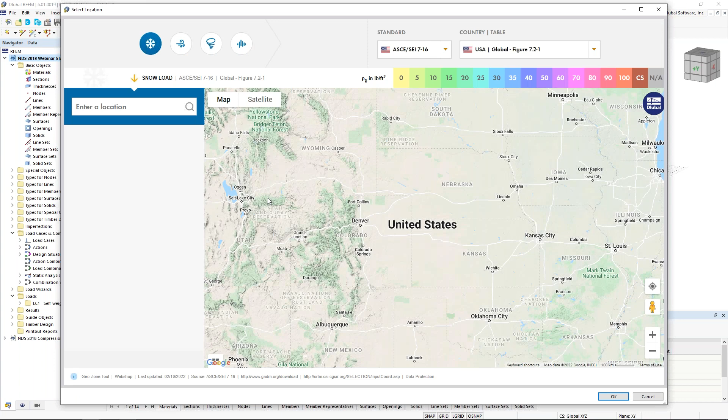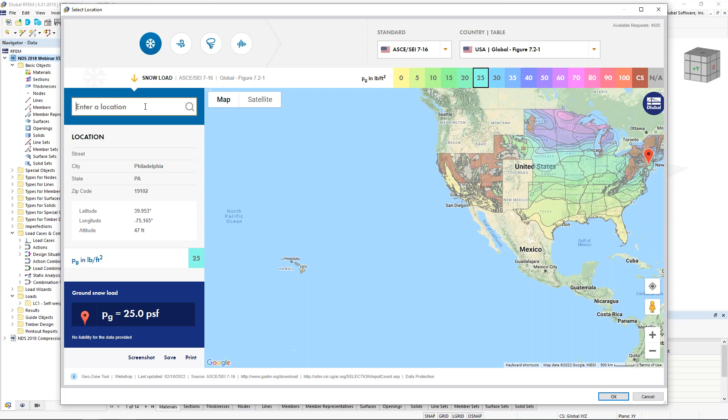Finally, under the model parameters, you can see that this links directly to our online GeoZone tool. This GeoZone tool is available on our website where we have integrated the maps from the ASCE 7 for snow, wind, tornado, and seismic. This is linked with Google Maps technology, so we just need to type in our project location, for example Philadelphia, and we can see the ground snow load is automatically populated here directly from the standard. When I click OK, all of this information is automatically imported into the model that will be used for those load wizards a little bit later on.

Once we are done defining the base data, we will be brought into the main program, and we can see our drawing grid activated here. We can modify those drawing grid settings by right-clicking at grid down at the bottom. My default spacing here is set at 1 foot. If we see anything other than this, for example when you first start the model, you might see something like around 3 feet. You can always hit this default option here to go back to the 1 foot or adjust this to maybe 0.5 feet.

We can also open up our units here and change this to inches if we're working on a much smaller scale.

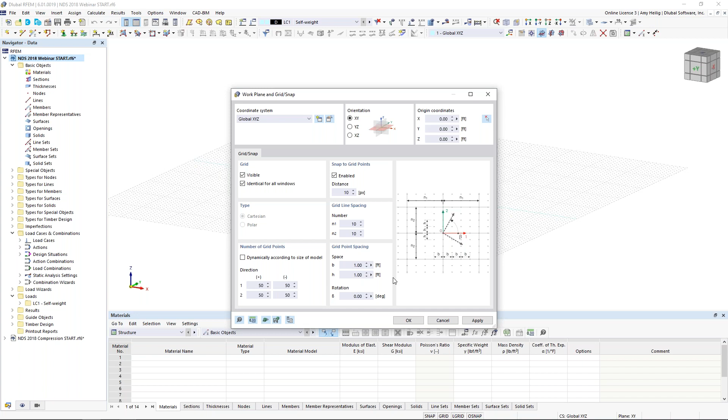There are many different ways to model within the program. We could begin by drawing our first member and defining the cross sections and materials as we go. But an alternative option I'm going to take is to define all of my cross sections and materials at the beginning. So over in the navigator, I can right click on my sections and create a new section here.

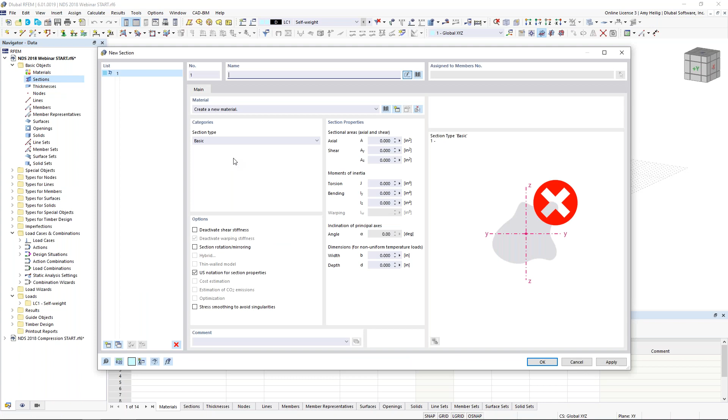I want to access my section library, and we have our standardized sections over on the left, which does include timber. So when we launch this, we can use our filters over on the left to filter the NDS 2018, and we see the various dimensional sections available to us, including glulam, for example, and we can see all of the available sizes.

Now, the alternative option is to go back into the library here and choose one of our parametric massive sections. For example, we can just choose a rectangle. This allows me to input in the dimensions directly, and we'll choose 8 inches in width and 15 inches in depth. The cross-section properties will be automatically calculated here.

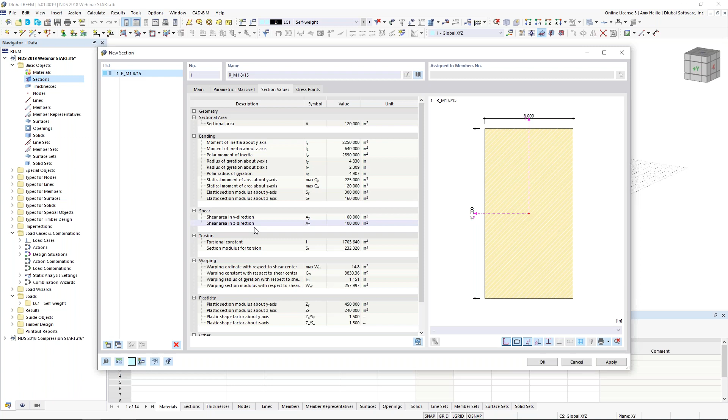And back under that first tab is where we need to set our material for this cross-section. So we'll visit our material database now, and we can use our filters over on the left here to filter to timber. We can filter to the NDS 2018, and sure enough, we have every single material available here from the NDS standard.

Now we can take it a step further, and perhaps we want to filter to table 5A for our glulam materials. I'm going to select 24F 1.7E. Over on the right-hand side, we can see the different options, and we'll choose Southern Pine. I click OK, and now that material is available to me for all future sections that I will model in the program.

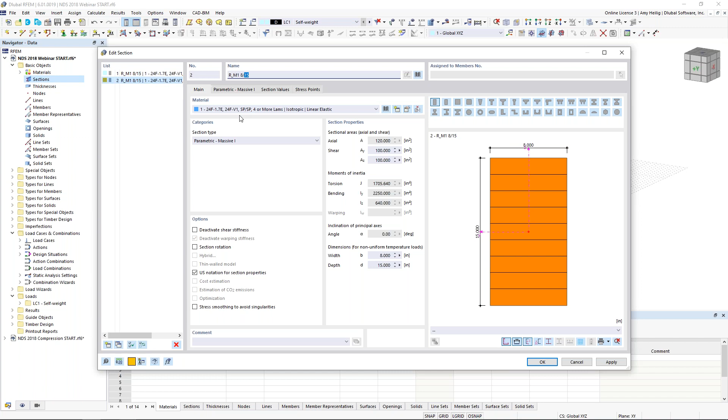I can simply make a copy of this existing cross-section, and rather than going into my library, I can simply type in the exact dimension here, 26. So we'll notice that this cross-section updates accordingly. Same material will be used.

We want to create one more cross-section here. This time, instead of a rectangle, we'll choose a parametric square section. Under the massive tab here, I will go ahead and adjust the dimensions to 6 inches. Under the main tab, I don't want to set glulam, but rather I'm going to go back into my material library and choose table 4D.

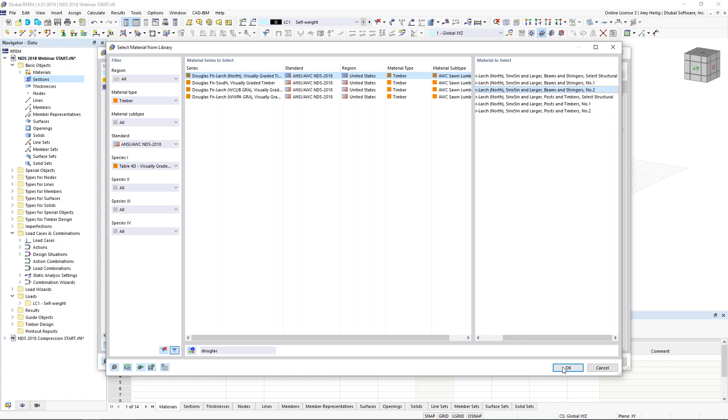Now we can see all of the available materials to us, which is still a little overwhelming, so we can take advantage of the search options down at the bottom. For example, if I begin to type Douglas, notice that all of the materials with Douglas within the name are now filtered. So I can choose Douglas Fir-Larch North, and then I can scroll over to select number 2. I click OK, so now we have that solid section given to us here.

Once I click OK, what I'll notice is that my materials and cross sections are now available within my navigator here. So I want to begin by drawing my first member.

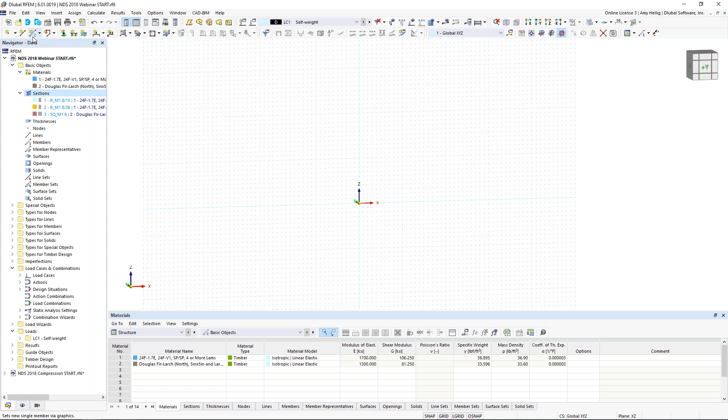I will adjust my drawing grid into the vertical XZ plane, and I will go up to my tool to draw a new single member. The member type is going to be beam. The design properties are activated here, and this is specific to the Timber Design add-on and relative to these additional tabs up at the top.

We'll leave this enabled, but I'm not going to get into the details right now specific for the design properties. We'll go to the section tab here, and the distribution type is going to be set to linear.

This allows me to define a tapered glulam section. Now, new within RFEM 6 is that previously we only allowed you to define a tapered section that looked exactly like this, where the center line just runs right down the center. But we have added within RFEM 6 the ability to adjust the alignment. So now we can see that the taper only occurs at the bottom section of the member.

The member start will be that 8 by 15 section, but the member end will be the 8 by 26 that we've already defined. The material is automatically set here, so this is all that we need to do to define our first member.

We click OK, and I can snap from the point 0,0,0 up to a point 15 feet in the vertical direction, and we have our first tapered member. Now, in a similar fashion, I can snap to a point here 23 feet in the X direction up to the top of the column.

If I right click to exit out of that dialog box, I see here that I would like to add in some type of pitch for my roof, and I'd like this pitch to be 14 degrees.

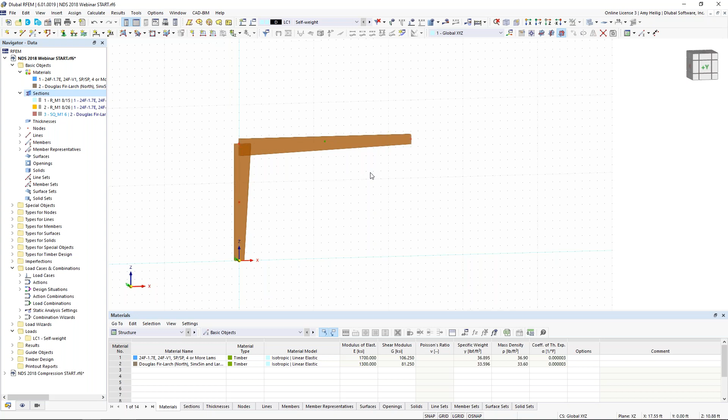So rather than manually having to figure out the geometry, we can select this member, and under the edit options, I can go down to rotate. And I can input an angle of -14 degrees.

I would like to rotate about the global Y-axis in the vertical Z direction, and then I need to graphically select my base point here. I click OK, and so now we'll have that 14-degree incline.

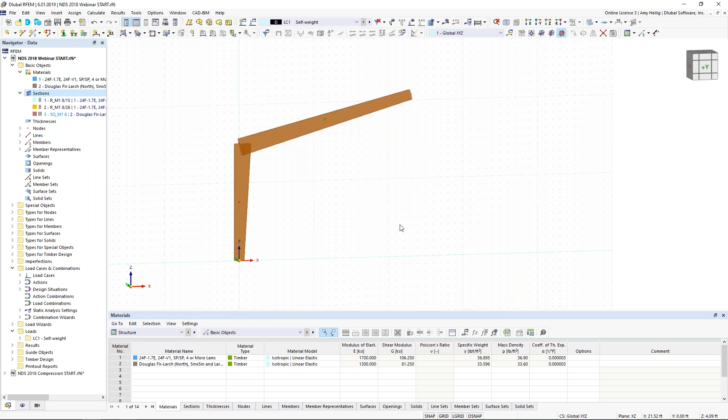I select both of these members, and I'm going to utilize my mirror tool. This is exactly like what we would see in something like AutoCAD, where I can create a copy. I would like to mirror about the ZY plane, and I'm going to choose my mirroring point right here at the apex. I click OK, and we should see our first frame generated.

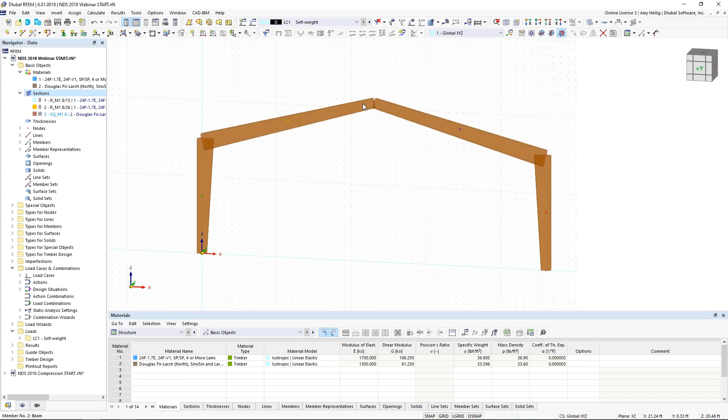Now I want to add a member hinge at the top here only for my beam on the left. I can do so by double clicking on the member. By default, everything is considered fully fixed, so in order to add that member hinge, I can activate the hinges here.

And now we get a new tab, and at the member start, I can define my member hinge. The program automatically suggests I probably want to release the moment about the local Y and local Z axes. That's correct.

I click OK, so now that member hinge definition is available to me for any future members within this model. I don't need to keep redefining; I can simply select it from this drop-down box. I click OK, and now we should see that member hinge applied to that beam on the left.

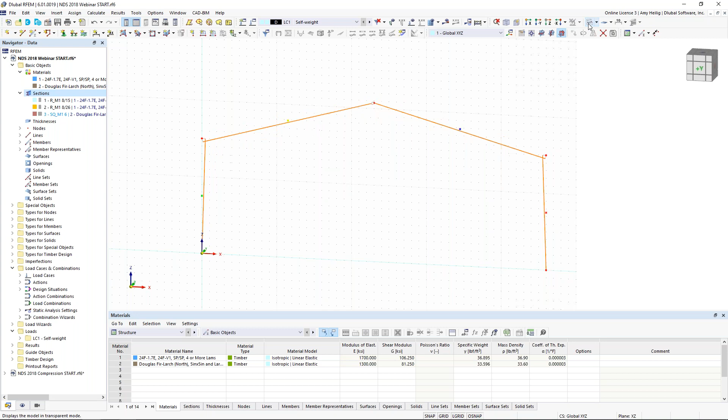So I'll turn this into wireframe view, and I'm going to turn off my member representatives in order to make this a little bit more clear for you.

I'm going to hold down my control key to select both of these top members, and I'm going to right click, and under members, I am going to divide the member by a set number of intermediate nodes. I want to add 2 nodes along the member length here, but it's really important that I also check this option down at the bottom to create the on-member nodes without actually dividing the member. We want to keep these as one continuous segment and just have these nodes added along the length.

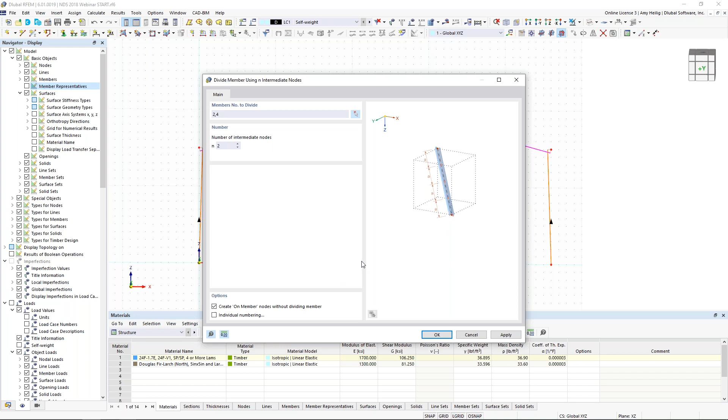So when I click OK, you'll notice that these nodes are added. They're a different color than my standard nodes. If I double click on it, the reason why is because it has this special setting here: the node type is set to on member rather than standard.

So now any other member that frames into this original member, maybe we add in some nodes at these, or add in some loads at these specific nodal points, will all be detected along the member length.

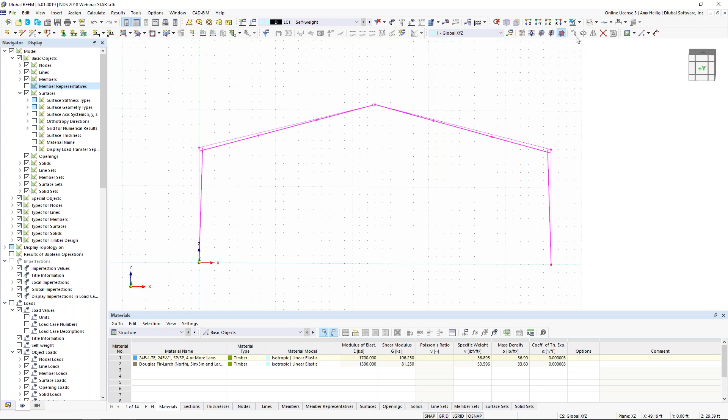I'm going to take my selection box and drag from right to left, and notice I am not going to select the nodes at the bottom of the structure, and there is a reason for this. We will select all of these options except for those nodes and utilize our Move Copy tool.

The Move Copy tool allows me to create a copy, and I'll create 4 copies in the Y direction of 16 feet. But under my second tab, I have this option to activate these step links. So when I activate this, I get a new tab, and the program allows me to create new members between my copied nodes. So I can create a new template, and this should look like a familiar dialog box.

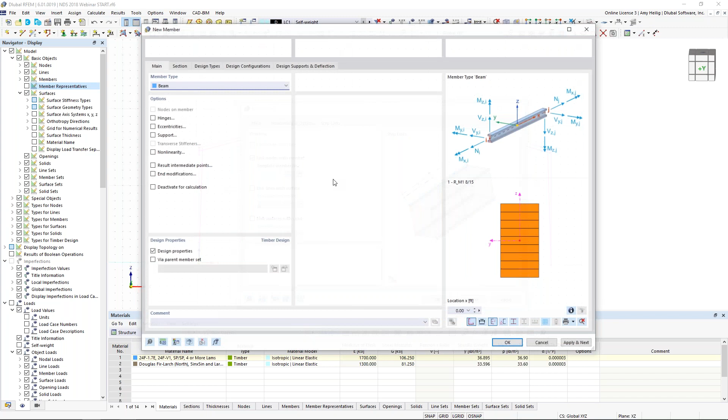It's as though we're drawing a new member. The member type is going to be set to truss.

So truss is a little different, and you'll notice that the hinges is now grayed out. That's because internally we're going to assume that we have a moment release at the member start and the member end. So rather than having to manually define that, we can select truss, and that's automatically applied.

Now for my cross section, I want to use my drop-down box here to select that 6x6 solid Douglas fir-larch section. I click OK. Remember, I'm still within the Move Copy dialog box. I click OK. And again, the advantage is that the program has automatically generated those members between those copied nodes.

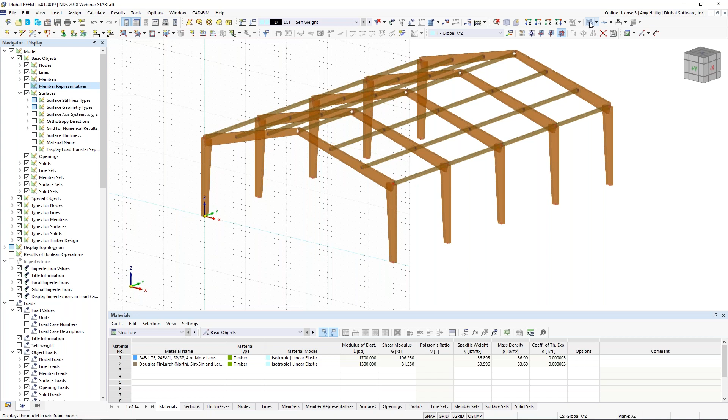Okay, so what we would like to do now is to add some columns at the front and rear of our structure. What I'll do is turn this back to wireframe view, and I'm going to adjust my drawing grid origin with this button up here in my toolbar. And I want to snap that directly to this point along my member length. So we can see when we rotate this around, the drawing grid's still at the front of the structure, but I've just modified the location.

We're going to draw a new member. The member type is beam. I do want to activate the hinges here. At the section tab, I will leave this as the 8x15 section, but not tapered, just one continuous section throughout the length. For the hinges, I would like the member hinge to be applied to the member end. Remember, I've already defined that member hinge. I can select it from my drop-down box.

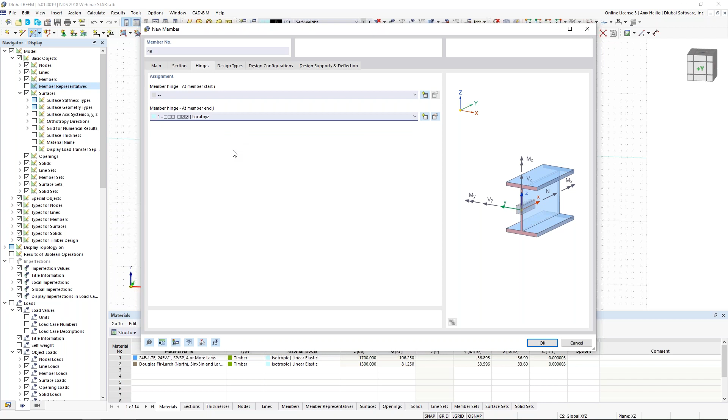I click OK, and I'm just going to snap here from a point at the bottom of my structure up to the top, the intersecting node. Now, this node needs to be slightly adjusted at the bottom. Rather than sitting at negative 0.33, I want it to sit at 0 elevation. I just adjust that, I hit enter, and now that column is exactly where it should be. I can highlight this element, hold down my control key, and utilize the drag and drop feature to make a copy here on the right side of the structure.

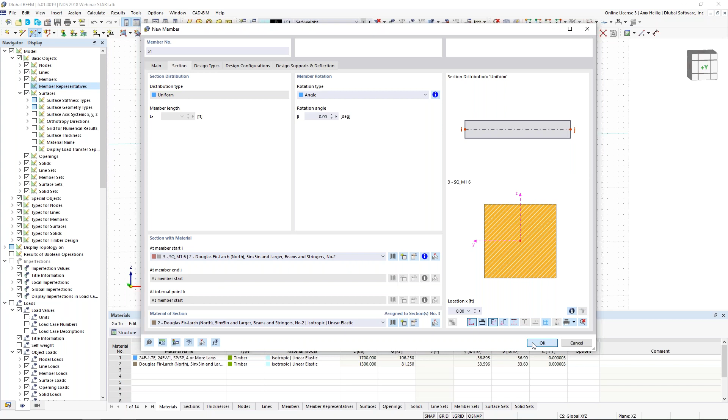I would like to add in some additional lateral bracing here in the global X direction. So we go to draw a new member. Once again, the member type will be set to truss. The section is going to be that 6x6 solid section here. Remember, I don't need to apply any hinges because internally the truss option is taking care of that. And I'm just going to snap from the bottom of my column elements up here to the top. I can rotate this around. Notice the program automatically snaps to these nodal points.

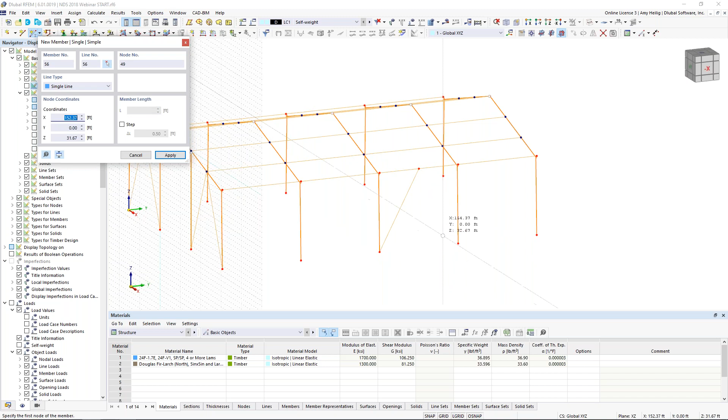While I'm still within this dialog box, I want to add in additional lateral bracing here in the global Y direction. So I will snap from the bottom of the column. Notice the program detects the midpoint here of that truss segment. And I'll do so up here on the roof by just selecting my start and end node points. And we'll do it one more time here. I right-click to exit out of this dialog box, zoom in just to make sure everything's connected, everything looks fine.

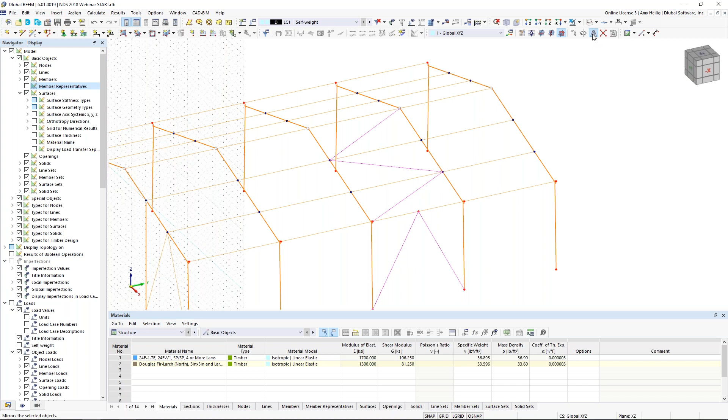Now I'm going to hold down my control key to select these additional brace elements that I just created. We'll utilize our mirror tool once again to create a copy about the YZ plane, and I'm going to select my mirroring point at the top here of my structure. I click OK, and now we have the bracing on the other side.

I would like to take these elements at the front of the structure. I will use my selection box to highlight them all. I hold down my control key, I drag and drop to make a copy at the rear of the structure. So now those column elements and braces are shown at the rear of the structure with that simple tool. Okay, the member modeling is now complete.

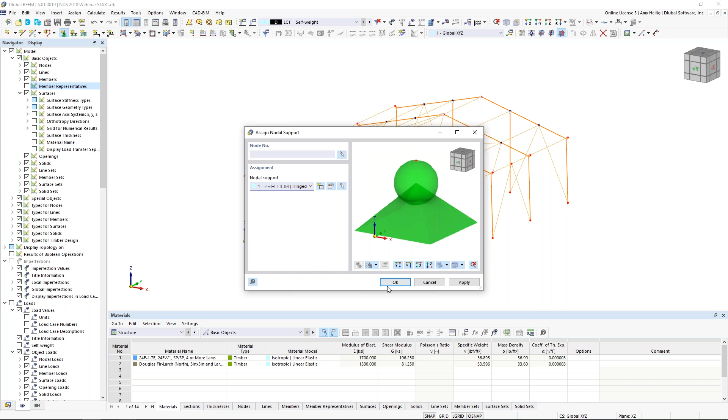What I would like to do is to support the structure with a new nodal support, and we can find that up here in our toolbar, assign new nodal support. Now we have some default options here within the dropdown, including a typical hinged, we have fixed, or we have a few roller options. Of course, you can always create your own nodal support option with the 6 degrees of freedom. Non-linearities are available in there as well, but for today, we're just going to choose the default hinged. I click OK, and this will allow me to highlight over all the nodes at the bottom of my structure.

And if I right-click to exit out of that dialog box and right-click on any one of these nodal supports, I can use my slider option here to increase or decrease the size. So that's also new within RFEM 6.

So our member modeling is complete. We've added the supports. I'd like to move on to loading now, but there's one thing that I want to take care of related to modeling that does affect our loading. So this will be a structure with obviously some type of roof membrane. But I don't want to actually draw in the roof surface with a material and thickness. Rather, I'm going to take advantage of a new feature within the program for load transfer only.

So I'm going to draw a new surface, and the surface is not going to affect the stiffness. It does not add any rigidity to the structure. We're not applying a material. We're purely using it for load transfer to our members. So within our toolbar, we can draw a new surface, and I'll choose the option polygon.

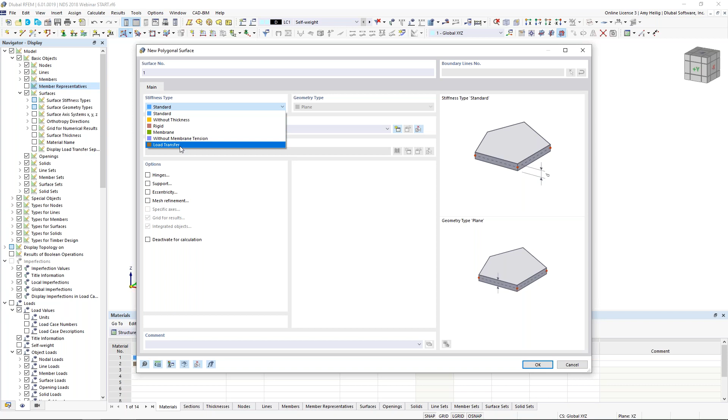So again, rather than the stiffness type set to standard, where I would define a material and thickness, we're going to use our dropdown to select this new option, load transfer. Everything is grayed out here. Again, we're not adding stiffness, but rather we go to this second tab here and we tell the program in which direction do we want to transfer the load.

Based on one-way load distribution of the x-axis, these are local x-axes of the surfaces, local y-axes, or do I want two-way load distribution in both directions? We'll go ahead and stick with only the x direction. And when I click OK, this allows me to snap to my different points here to draw in this load transfer surface on the left side.

And we can see that dotted line shown there in wireframe view. We'll do so on the right-hand side, and we'll go ahead and close this loop by selecting our original point, and here are those two surfaces generated. I can right-click to show the local axis system of those surfaces, and we can just make sure that the local x-axis direction for the load distribution is in the correct orientation.

I'll turn back off the local axes. We can even turn this into rendered view here if we'd like to see those surfaces in a bit more detail. So now that these surfaces are drawn, our modeling is complete and we can truly move on to the loading.

So in order to apply the loading to the structure, we need to set up our load cases. I will go up here to my toolbar to select Edit Active Load Case. Now the program by default creates my first load case here, and it is called self-weight. Well, I can go ahead and rename this if I would like to dead load. Notice the self-weight is active here. The action categories are based on the ASCE 7, and we have selected dead load from this dropdown.

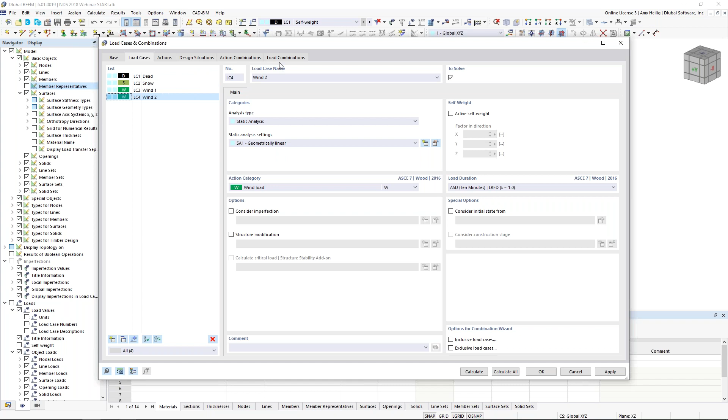I'm going to create a second load case. This will be called snow load with the action category of snow. Self-weight is unchecked here. We don't want to account for it twice. I'm going to create a third load case, which will be wind 1 with the action category of wind load. And I can even make a copy of this existing wind load case to just simply rename it to wind load 2. Now I'll get back into this dialog box to explain a little bit further about design situations and load combinations, but for now I just wanted to set up these load cases.

So now that those are set up, I can actually apply the loads to the structure in the relevant load case. We'll begin with dead load. So the entire advantage of these new surface load transfer options is that I can now apply a surface load to this structure, which is going to be much more efficient than applying individual member loads to each one of my frames, for example. So I'll go up here to draw a new surface load.

And the load magnitude is going to be set at negative 0.01 kips per square foot. I can graphically select here surface number 1 and surface number 2. I click OK, and here are my loads shown graphically on the structure. Now, under the display settings here in my navigator, we will see up at the very top our surfaces tree. When I expand the surfaces, we have this setting here to display the load transfer separately.

So I can activate this, and now we can see the loads applied to each member based on the tributary area. So just a bit of a time saver here by utilizing these surface loads.

Now for our snow load, we want to take advantage of our load wizard. If you remember, we set that up within the base data at the beginning of the presentation. So going back to my navigator here, but this time under my data tab, I'm going to scroll down and I'll see my load wizards tree. And we have available the snow loads. So I can double click on this. And what this will allow me to do is to automatically generate the snow loads according to the ASCE 7.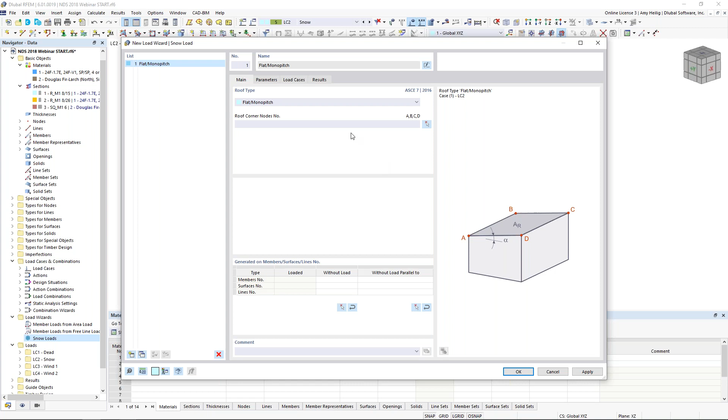So we want to choose the roof type for a dual pitch type of structure. Now, I just want to let you know that this load generator is only applicable for rectangular type structures. If you have anything outside of this geometry, you won't be able to use this automatic load wizard. So just keep that in mind. For today, we do fit into this geometry, so we want to graphically select here the nodes that make up the roof. So we will select the 6 exterior nodes, and I just click one by one. Once I finish that, the program automatically detects what the roof geometry is.

Under the parameters tab, the program has already input my ground snow load. We have connected that to the GeoZone tool directly from our website. It inputs the 25 PSF ground snow load directly from the ASCE 7 maps. Now, of course, you can manually enter in this information as well. Now, the snow load parameters, maybe you'd want to adjust these, such as the terrain category, roof exposure, risk category. We can use our drop-down box for any one of these options.

Under the load cases, we have the ability here to create both the balanced and unbalanced load cases. Now, I'm not going to create the unbalanced for today, so I'll just go ahead and uncheck them, but we will create the simple load case for balance. The program recognizes, okay, we probably want to use load case 2 here that was already set to the snow load designation. So it's populated that.

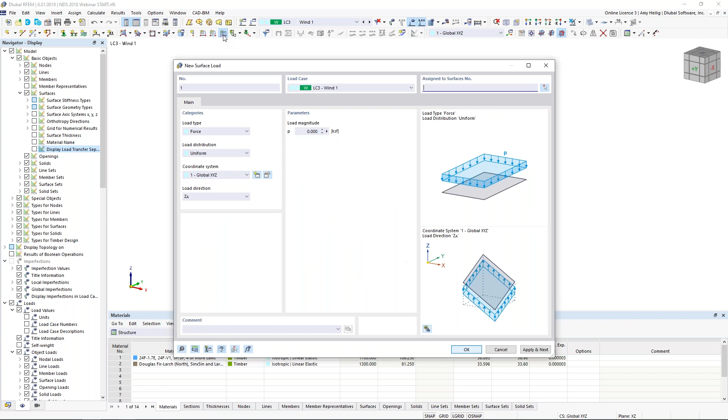Well, for load case 3 here, we will begin with a new surface load. The difference here is that I want to change this based on the local X, Y, and Z coordinates of the surface itself. So we'll leave this according to the local Z direction. I want to modify the magnitude to 0.025 kips per square feet. I select graphically surface number 1. I click OK. And then notice I'm going to hit apply and next. What this allows me to do is to remain within this dialog box, but we can see the upward wind load applied in the background here to surface number 1.

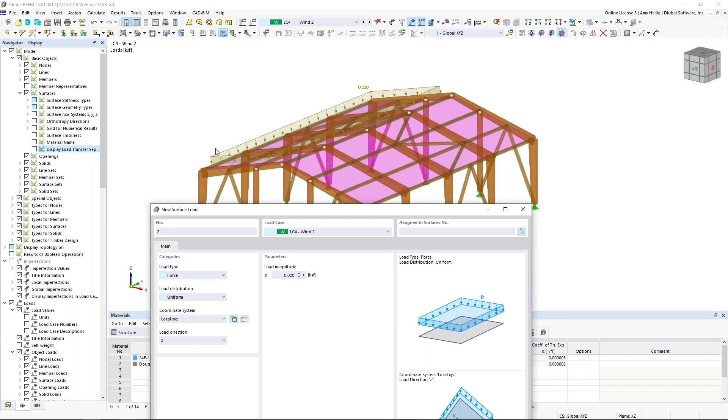Well, now I can just simply adjust the magnitude to 0.015 kips per square feet. I can graphically select surface number 2. I hit apply and next, and now we see that additional surface load applied on the second surface. Well, now I can simply switch to load case number 4, while again, still within this dialog box, I adjust my magnitude to negative 0.02 kips per square feet. I can type in surface number 1. I don't necessarily have to graphically select it. I hit apply and next, and we see that downward pressure applied to surface number 1 under load case 4. I'm going to adjust my magnitude for the last time here to negative 0.01 kips per square feet.

I apply to surface number 2, and I click OK. So now all of our loads have been applied to the structure. So let us go back into the load cases and combinations dialog box here.

Back under the base tab, remember we have activated the load combinations to automatically be generated according to the ASCE 7. The program does require us to choose the wood option because we have activated the timber design add-on. And the entire reason for this is the feature of creep. So let us jump back to the PowerPoint to discuss this in a bit more detail.

This entire topic is new within RFEM 6, and we want to refer to the NDS 2018 section 3.5.2 for long-term loading. Within the code, and this section in particular, it talks about the time-dependent deformation or the creep factor K sub CR. And this factor should be applied to the long-term deflection, but not the short-term, in order to be considered for the total deflection according to equation 3.5-1, and we can see that written here.

So when we automatically generate these load combinations according to the ASCE 7, in particular wood, we are going to create a third design situation. And design situations will make a little bit more sense in just a minute, but I want this to be clear that we are actually going to reference the IBC 2018, and in particular section 1604.3, in order to generate the serviceability load combinations directly from the IBC for our serviceability checks when we go ahead and run the timber design.

And within these load combinations designated within this design situation, one of them will include this creep factor multiplied by our dead load. That's in order to consider creep. So a new feature here, previously we were not able to consider this creep factor. So you'll notice within the drop-down box, if we do not want to consider creep at all, we can just set this to 1.0. But otherwise we would choose the 1.5 or 2 factors here. This comes directly from the NDS standard.

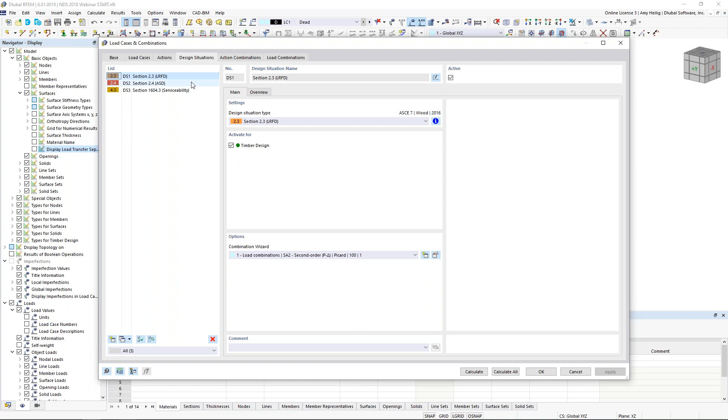I always like to activate this option here, combination names according to the action category. And we will jump to the design situations. So we have 3 design situations generated, 2 directly from the ASCE 7: LRFD, which is our factored load combinations, and ASD, which is our unfactored load combinations. And again, this is new within the ASCE 7 wood, we are going to create this 3rd design situation here for serviceability.

If we want to click this info button, we can see directly the load cases that will be considered for the generation of the load combinations. And here is that creep factor times our dead load. All of these are active for our timber design add-on.

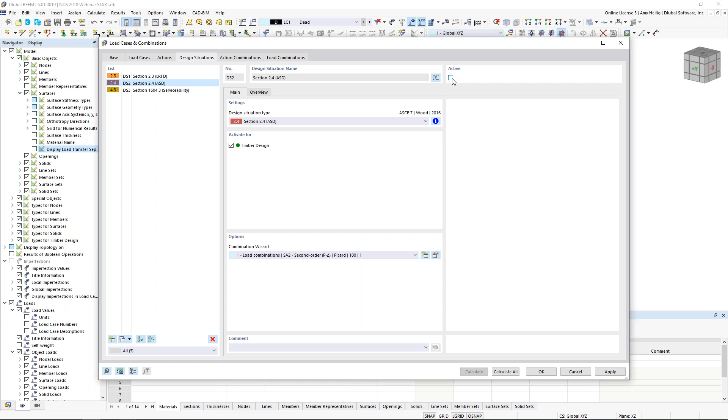Now for today, I am going to be doing my design according to LRFD, not ASD. Therefore, I don't need the ASD load combination. So I can just simply deactivate that here. It will just decrease the number of load combinations, which we can see here under our last tab.

Here are my factored LRFD load combinations for my first design situation, and my 3rd design situation are my IBC load combinations. And here we see the 1.5, and we can toggle here to the assignment, the 1.5 creep factor multiplied by our dead load.

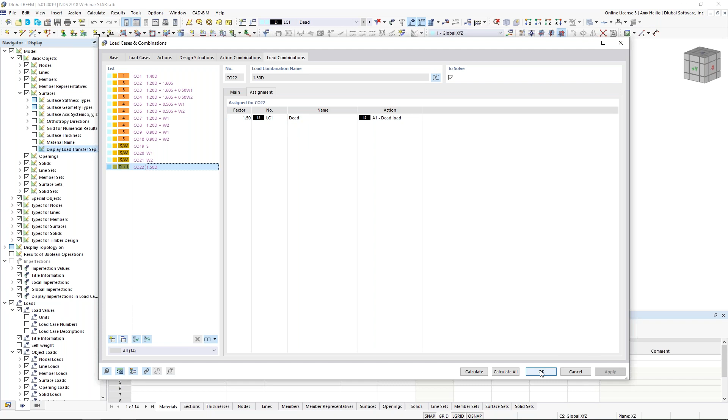Okay, so now that these load combinations are set up, what we can do within our drop-down box is see all of the available load combinations we were just looking at. We can view all of the loads applied to the structure, including the relevant load factors according to the ASCE 7 and the IBC. So technically we are ready to run the analysis portion, but again, the huge advantage of running RFEM 6 is that these add-ons have all been integrated here within the main program. So we want to do the analysis and design workflow together.

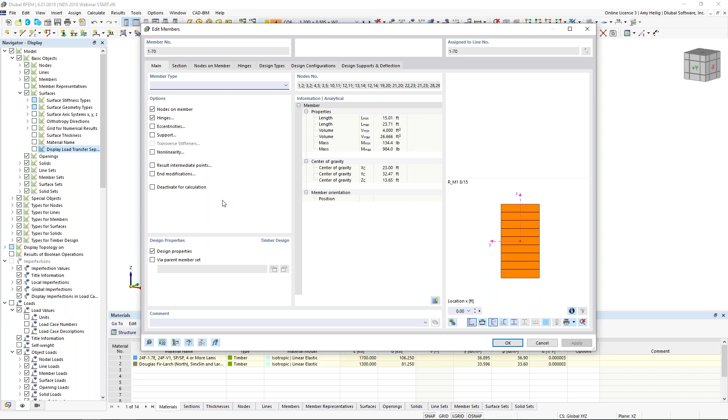So what I'm going to do is to move into the design properties for all of these members. And if I highlight all of my members and I take a look at the edit member detail settings here within my dialog box, you can see I have members 1 through 70 selected. And we have our design properties turned on here, which activates these various settings here for design types, design configurations, and so on. Now, rather than individually setting this information, I want to take advantage now of our member representatives.

So I will go back into my navigator display settings. I'll turn off my surfaces here.

Let me turn on the member representatives and wireframe view. So you'll notice we have a lot of color coding going on here. Again, we have activated that within the base data, so the program has grouped together similar members with cross sections, materials, and so on.

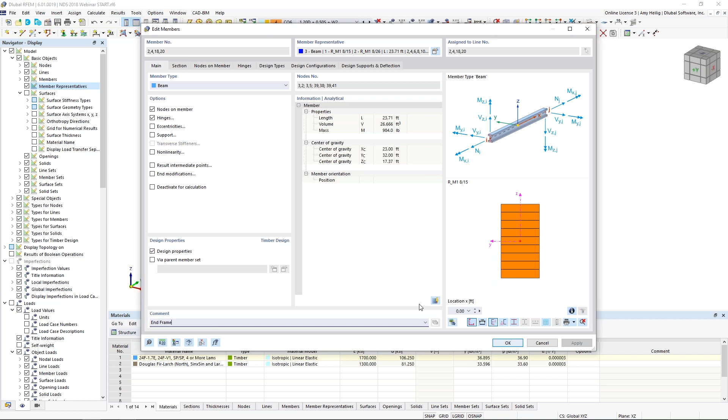Now, I want to take these 4 members at the end, and I'm holding down my control key to select them. I am going to double click to edit, and I'm going to add a comment down here, such as end frame. Remember, I also activated the option at the beginning of the presentation so that member representatives will detect different comments. So now these 4 members are in a different member representative group than the interior members.

Back under my navigator display, I can also see the color coding, and we can scroll through the different member design or member representative options here. Okay, so what is the advantage of these? Well, when I double click any one of these colored dots, so for example, we'll start off with member representative number 4, it will bring me into the member representative dialog box, and you'll notice we have these exact same tabs that we saw for each individual member.

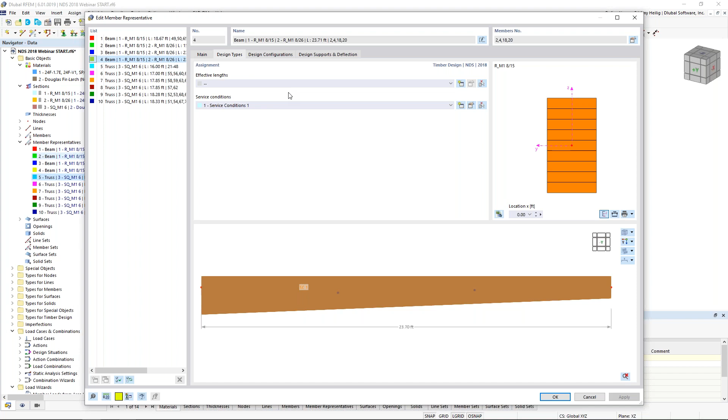So what I can do now is to input the design information for a group of members that I know are all going to have the same unbraced lengths, for example, the same service conditions, whatever it may be. That way I can go into the member representatives, make a change, and it will affect all of those group members rather than individually applying to each member. So let us begin here with these initial tapered members. Remember, this includes the 4 exterior girders here.

Now we want to start off with the effective length. So I'll create a new effective length here. And this is my input information for stability design. So we're talking about flexural buckling about the strong axis, the weak axis, and lateral torsional buckling. Now we want to set the information here on the second tab.

But before I do, when I initially create a new effective length, notice over on the right-hand side, my members aren't populated. Well, if I initially create this definition, I click OK, and I go back into edit the same effective lengths, notice now the program says, okay, we're going to assign this to members 2, 4, 18, and 20. Why do I want to do that? Because now my picture in the lower right-hand corner will populate here. So I can see exactly which members I'm looking at in order to apply my intermediate restraints.

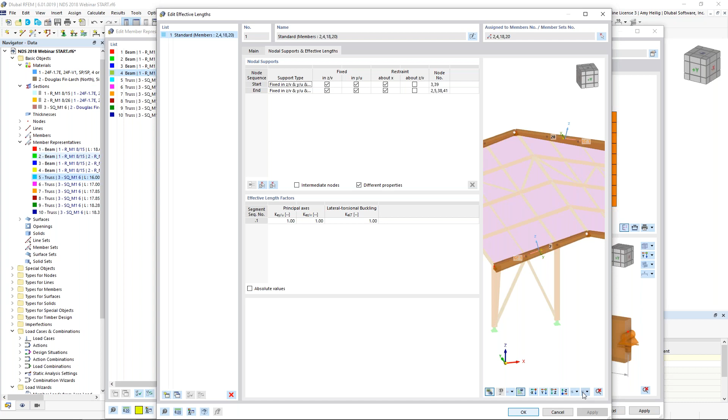So let me turn this to wireframe view. Now, this all has to do with K-factors, with unbraced lengths, incredibly important for design, and we have two options here. Number one is we could work with the table down here at the bottom. Perhaps we want to toggle this to absolute values, and I could just directly input K times L for my strong axis buckling, weak axis buckling, lateral torsional buckling.

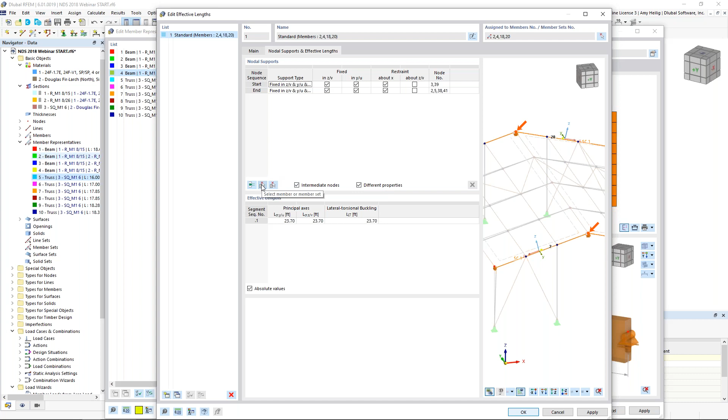Now, alternatively, I can take advantage here of inputting these intermediate supports graphically so that the program can calculate the K times L or the effective lengths automatically for me. What I want to do is to have the program detect the intermediate nodes along the member length. So I'm going to activate this option here, intermediate nodes, and then I'm going to use this option to select the member. I can select any one of these 4 members here. I'll just choose any one of them. And now notice the program has detected these 4 nodes along the member length.

So we'll begin right here at the apex. Well, notice we only have a truss member framing in the weak axis direction. So I probably want to add this intermediate restraint here to only restrain my tapered element in the weak axis or local Y direction. For node number 2, we have a column framing up. So I'm going to assume that this element is restrained in the vertical Z direction, as well as in the weak axis direction from my truss, as well as rotation against torsion at this location.

For my third node here, I'm going to assume these braces really have not much impact, so I'm only going to restrain the member in the weak axis direction. And finally, for my fourth node, we're going to leave this as default in the local Z, local Y, and about the local X axes. So now these 3 segments are updated here to consider my true unbraced length.

This is how we can automatically account for this within the program by setting these intermediate restraints. When I click OK, we can see in wireframe view these intermediate restraints applied internally within the member. They're not true supports like nodal supports that we initially applied at the bottoms of our columns—they're purely used for the design.

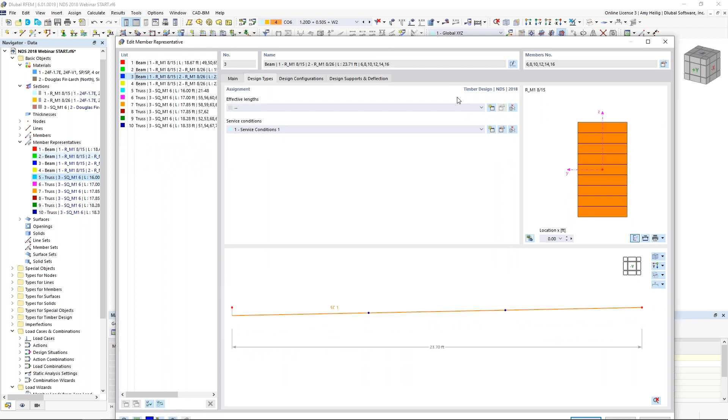Now we want to jump to our member representatives, which include my 6 interior frame elements. We have a bit of a different scenario here, so I'm going to create a new effective length and define it. I'll click OK and go right back in to edit it. Under the second tab, I can toggle to my picture and see my 6 members updated within the graphical view.

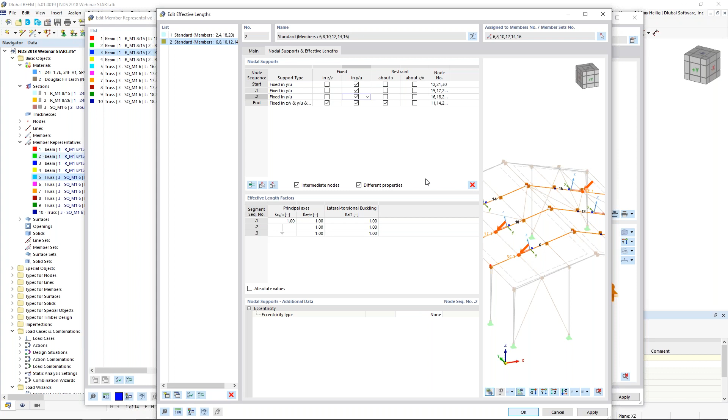I want to detect those intermediate nodes, so I'll graphically select any one of those 6 elements. I see my 4 nodes detected. At the apex, I want to restrain it in the weak axis direction only. At my second node, also weak axis only. My third node, weak axis only—we have no columns framing into the center beams here. But finally, at my fourth node, we do have a column, so I'll assume the program restrains this in the vertical Z direction, the local Y direction, and about torsion. We can toggle to absolute values to see everything updated accordingly.

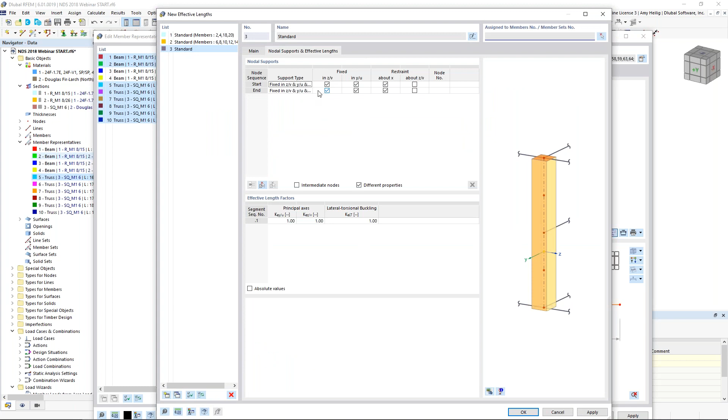Now that we've defined these for the 6 interior members, we can see the program update automatically to show what will be used for design. Let's talk about the remainder of these member representatives—holding control to select all of them, which is all the remaining braces and columns. For this we need to define a third effective length, and this one is much easier: we just leave it as default. These members are supported at the member start and end according to these default options, with no intermediate nodes detected. I click OK, and we see the program update graphically.

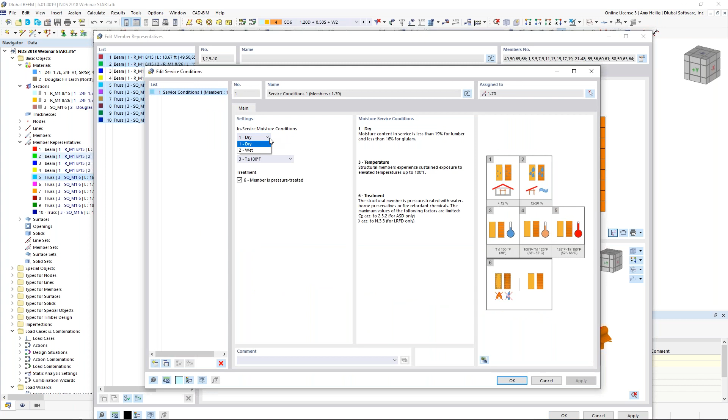For the rest of these settings, the service conditions—if we go into detail settings—ask whether the members are wet or dry, what the temperature is, and whether they're pressure treated. We know this all affects the adjustment factors for the NDS design.

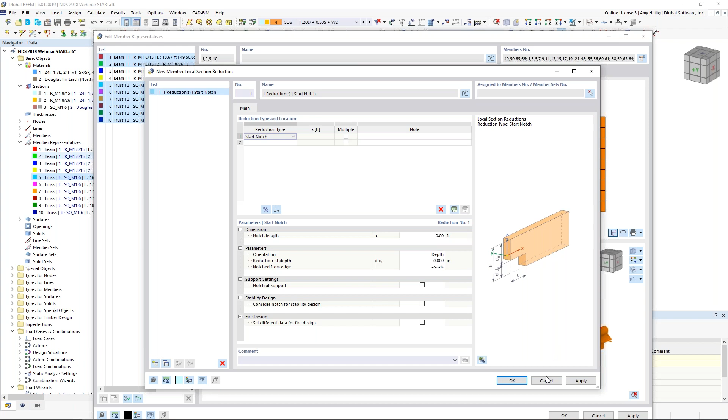The local section reductions let us create notches in our members—perhaps a notch at the member start, the member end, or internally—defined here with these section reductions. This is only available for standard members; you wouldn't see this option for tapered members if we went back to one of those other member representatives.

The design configuration includes strength, design, serviceability, and fire. Let's begin with the strength configuration and go into the settings—various options that go into the strength design specifically according to the NDS.

For example, torsion—if we're not really wanting to design these members for torsion, since the NDS is a bit vague on torsion design, and I want to skip this, I can set a higher ratio here, such as 0.3. So as long as my stresses for torsion are below a 0.3 ratio of the limiting torsion capacity, we'll completely skip this check. That's a little trick you can do within these settings.

We have some additional settings, including the size factors, the flat use factors, and so on. Under the Stability tab, this is a new feature within RFEM 6 specific to the NDS: the representative dimension for tapered compression members. I'll go back to the PowerPoint to explain this in more detail.

Again, this is a new feature added within RFEM 6, referencing NDS 2018 section 3.7.2 for tapered columns. Previously in RFEM 5, for any check along a tapered glulam member, we were just using the depth at that relevant X location. But the code doesn't exactly say that—it says to calculate the representative dimension for the tapered column instead, and we can see equations 3.7-2 and 3.7-3 given to us directly from the NDS.

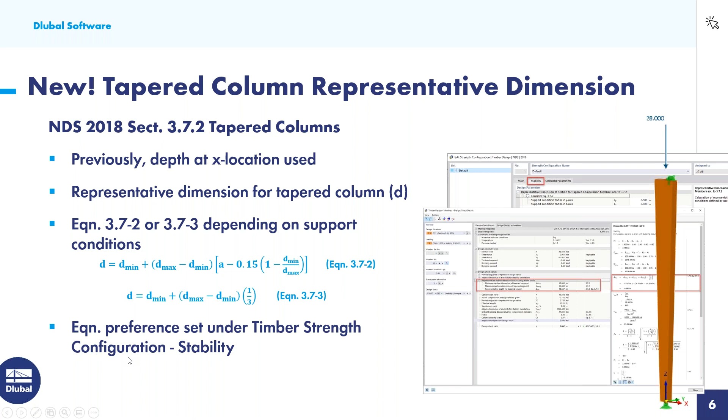Again, this all depends on your support conditions. You'll want to refer to the NDS to review these equations in more detail. The equation preference can be set under the timber strength configuration, under the stability tab, which is exactly what we're looking at here.

So I go back to the model and we can just go ahead and choose either equation. I'll stick with equation 3.7-3. Once we run our results, I'll show you exactly what this looks like and how we can now consider this according to the NDS provisions.

These standard parameters are just going to be all of those various factors that go into play for the NDS design. We have all the default options set here, but you can go in and adjust these as well.

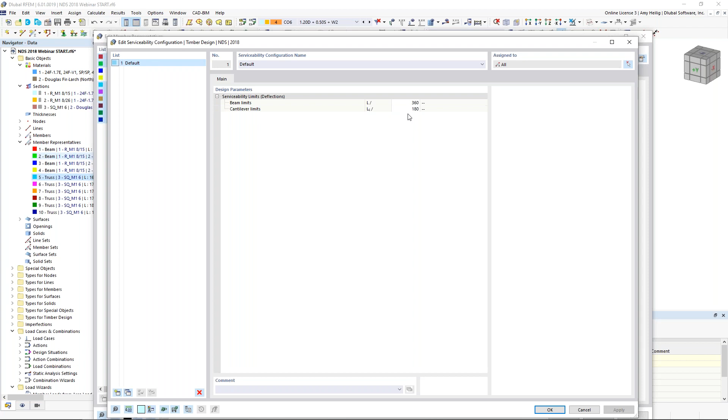So once we have reviewed the strength configurations, we want to take a look at our serviceability configurations, and this is quite a bit more simple. We have here our limiting deflection ratios, for simply supported L/360 and cantilevers at L/180, and you can adjust those as you see fit. Fire resistance design, we won't be doing that today, but that is a possibility to also calculate according to the NDS standard.

I'll just go ahead and clear out this setting for now, that's fine. The design supports and deflection.

By default, the program is automatically going to consider every member as simply supported, so it's going to refer back to that L/360 design ratio. Now, if you have a cantilever, you will need to define a design support, the member start or member end.

I am actually going to breeze through this tab here because our second quick example at the end of the presentation today will go much more into detail for this. So for now, we just want to keep everything as default.

Okay, so once all of these settings have been defined, we are now ready to run our analysis, but also the design of the structure.

So what we'll do is utilize our table options down here to drop down to timber design. This is active because remember, at the very beginning of the presentation, I've enabled that timber design add-on.

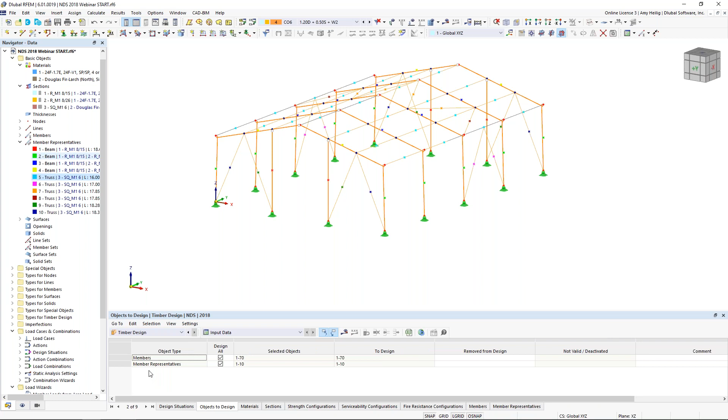If I take a look at my table settings here, in this first tab, design situations, I have my 3 design situations that were generated automatically from the program. We've already reviewed these: my LRFD, ASD, and then I have my serviceability from the IBC.

Well, I'm not doing ASD design today, so I'll just simply uncheck that. Now notice my factored load combinations, or my LRFD design situations, should be associated here with my strength limit state design, so I can make sure that that is selected appropriately from my drop-down box here.

I'm not doing ASD design, so we'll skip over that. Finally, my third design situation here for serviceability should be set according to the serviceability limit state design. Now the program knows which load combinations to refer to for my actual design portion of the calculation.

Now, if we wanted to run fire design, perhaps we go back into that load cases and combinations. We make a copy here of maybe our LRFD design situation, and we can select fire design from our drop-down box here. Under the objects to design, we see members 1 through 70 are automatically selected.

All of our member representatives are already selected here. Everything was defined for our design input for each one of those members, so we should be able to design all of them as well.

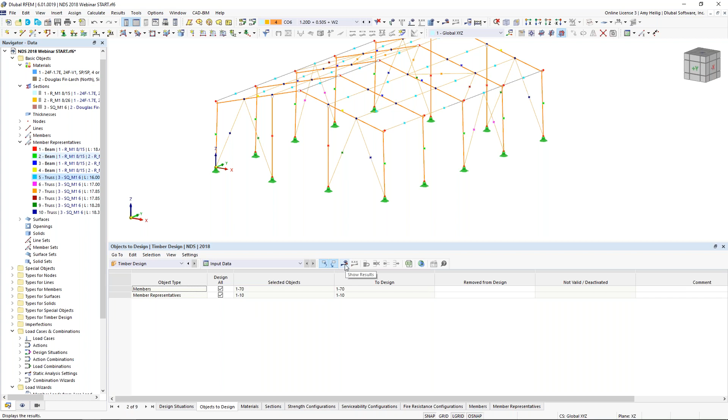I'm now ready to run my calculation, which I can do so directly within this table. So I begin the calculation and the program must inevitably run through all of my various load combinations in order to determine the internal forces, the stresses.

You can see that these solve pretty quick now in RFEM 6, and we're now running the timber design add-on according to the NDS standard, and here we are presented with our results.

So I'm now looking still within the table format for my timber design here, but now I have available the design ratios, such as for the member representatives. Down at the bottom, I can select the design ratios by member representatives here.

As you can see, the program is synced up with the graphical view so that we're showing you every check within the NDS. For this group of member representatives, the program will point you to exactly where the controlling internal force or stress is located.

If we're interested in filtering to only the max design ratio, we can take advantage of the filter options up here at the top. Perhaps we choose the option max, and now maybe we're not so overwhelmed, so we can just see what's exactly controlling for each member representative.

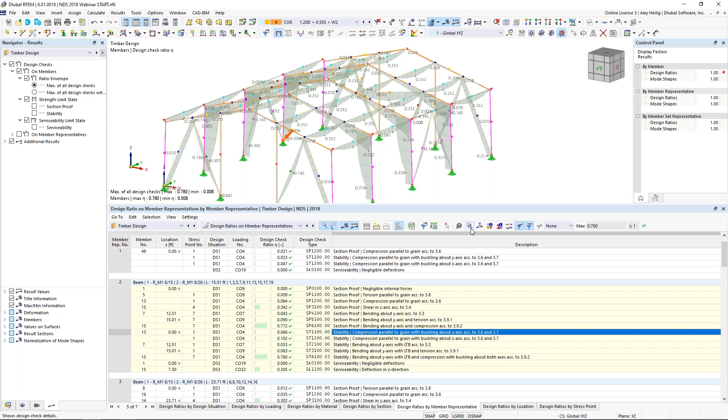Going back to the details within our design, I want to take a look at one of these checks. We can see the member we're currently looking at, one of these columns, and stability for compression parallel to the grain. We've added within RFEM 6 the ability to check out the design check details. I think this is incredibly powerful because now we are showing you all variables, all of the equations here, and also the code references directly to the NDS standard. All this comes into play to determine eventually what is our design ratio here at the bottom.

So incredibly transparent, we can understand where all of those numbers are coming from. We can add this information to our printout report. We can use our drop-down box over here to maybe move to a different section to view the details. But remember, we talked about in the PowerPoint the representative section dimension for those tapered members.

So here are our results now for that new check. We can see the representative depth for the tapered column is now calculated. When I click here, the program automatically highlights which equation is being used, and we can come up with that new depth that will be used for the calculations in stability. Just wanted to point that out - that was exactly what we just reviewed within the PowerPoint.

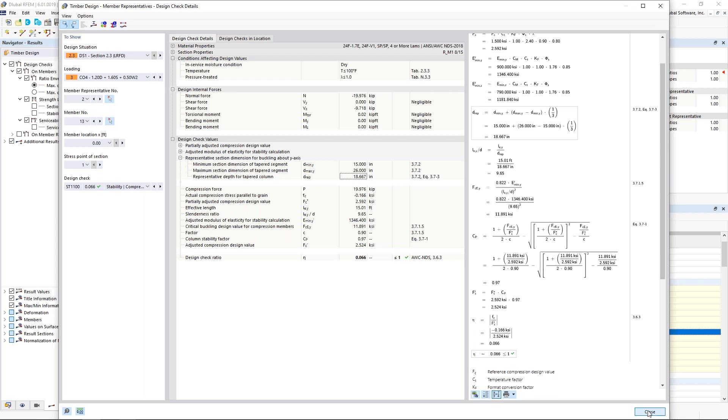Okay, so now that we have reviewed all of the timber design, of course there's much more to look at, but for the sake of time, we'll just give you a brief overview for today. Now, I want to back this up a step.

Let's take a look at only one of our frame elements here, and maybe we choose the visibility by the selected object, so we don't necessarily have to view the entire structure at once. I'm still looking at my timber design, and to briefly mention as well, everything's available to me graphically.

If we go back into our navigator, we can see within our dropdown, we are viewing the timber design results. Perhaps we want to turn off the max design ratio and only turn on the serviceability for this particular frame, or maybe we want to turn that off and take a look at the stability checks. So we can toggle those on and off, and add them to our printout report as well.

But in addition to the timber design, we also have this drop-down box for the static analysis. The static analysis was required to determine those internal forces, the stresses, deflections, and so on. Notice my table automatically syncs up here to drop me to the static analysis, and my results can be viewed in table format. For example, I'm currently looking at the deformation, but maybe I'm interested in the internal forces of the members, so I can see my axial forces here, my shear forces, maybe my bending moments.

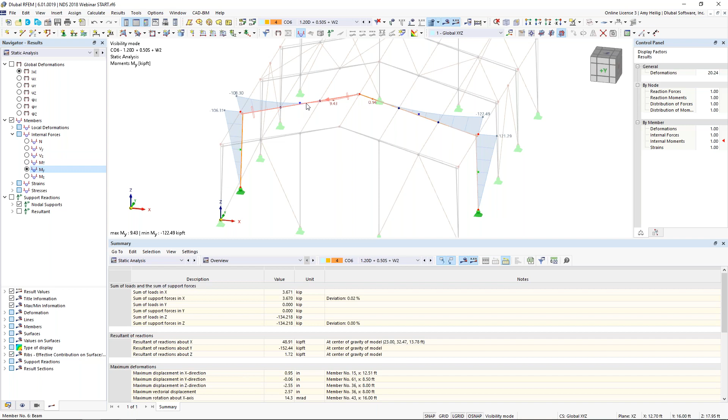For any one of these members, I can right click, and under the members option, I can take a look at my results diagram. The results diagram allows me to turn on and off these various internal forces, deformations. I can view in more detail what's going on along the member length. I can toggle to different load combinations here, add this to my printout report, and also drag this over to my second monitor and continue working concurrently within the program.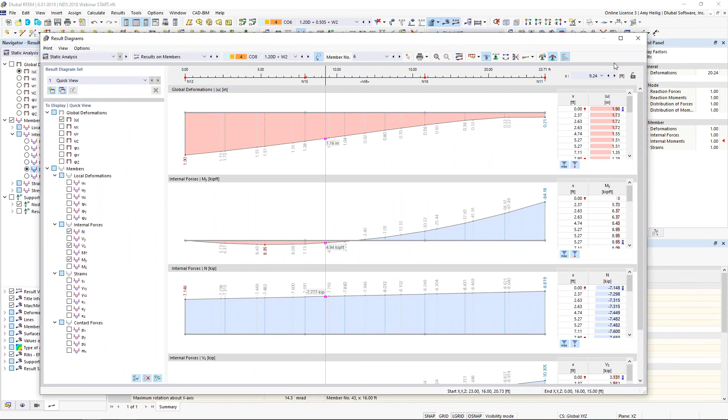So I think it's important to know, again, that both the static and analysis design workflow is working together within RFEM 6, and both of those results are available to us.

Okay, so that will summarize essentially timber member design for the most part of this entire structure, but I did want to talk about one more new feature, and I think that this is best described with a new model, just so we can simplify a little bit here.

So I'll open up this already saved model, and we can see that we have multiple members drawn here. And we have our main girder element spanning in the global y-axis direction. Then I have these additional joist members, and these joists are actually going to be supported by the girder member. So they're technically going to be placed at the top of this member.

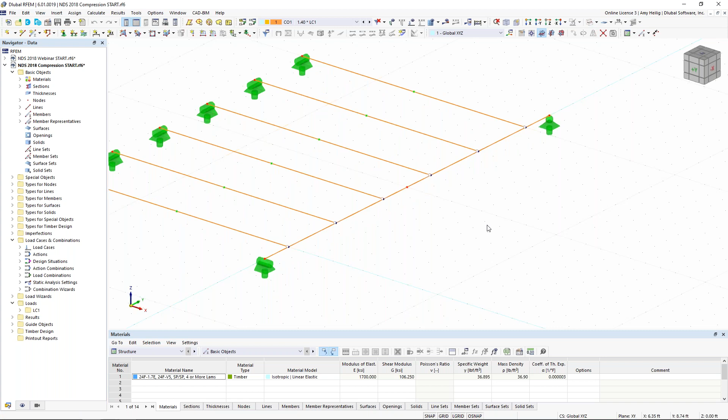When we turn this into wireframe view, we know that with any FEA program, these members are just represented by a single center line. Of course, we can render it just to get a better feel of what dimensions are being used, how these members frame in together. But underneath the hood, this is what's going on.

So if my joists are sitting on top of this girder, sure, I could add in an eccentricity to move these joists up to the top, but sometimes this causes unwanted moments at our member end. So for today's example, we're just going to leave this exactly as it's shown, but just visually know that we want these joists to be framing in at the top of this girder supported by it.

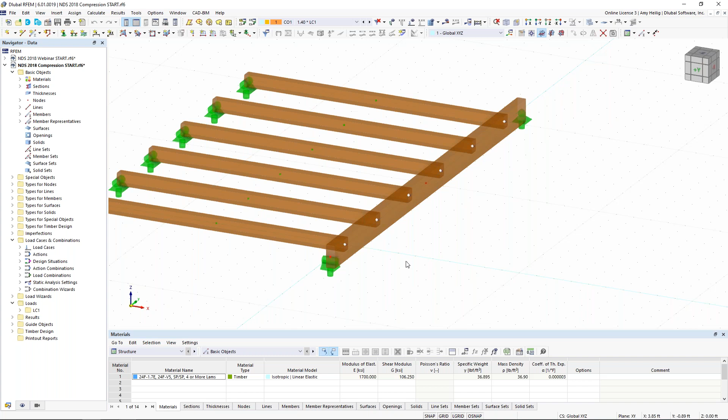So what is the entire purpose of this example? Well, now we want to turn to a topic that again is new within RFEM 6, and it is compression design with stresses perpendicular to the grain. So I'm going to highlight all of my joist elements here, and I can double click. Now, again, we could take advantage of our member representatives in order to set these detail settings. Or for my simple example today, I'll just set each one of them individually, so members 1 through 6.

Now we're going to go back to the design support and deflection tab that I mentioned in the last example I was just quickly going over. So what is the importance of this tab other than just simple deflection? I'll go back to the PowerPoint here so we can talk about compression perpendicular to the grain. And we'll be referring to the NDS 2018 section 3.10.2, bearing perpendicular to the grain.

Now, similarly, in our example today, not only do we have this situation, but we also have the joist sitting on top of the girder with a force acting downward, but it's still a stress perpendicular to the grain. Well, previously in RFEM 5, we did not do this check. And the reason is simple, is that the bearing area was not known. If you remember back to the wireframe view, all that we know are these simple line elements framing in together within the FEA analysis. But now within RFEM 6, we have the ability to do this check because we have the new feature under the design supports.

So you want to refer to the NDS section 4.2.6 because it is important here that we consider the reference design compression values perpendicular to the grain depending on the member's material. And the NDS has done some various studies to limit the deformation of these members and materials to 0.04 inches to come up with the design compression value. Well, alternatively, if you want a little bit less deformation, so let's say 0.02 inches, the code goes on to say we'll use 73% of the 0.04 inch design value. This is important because we do need to select this option in just a minute within the program.

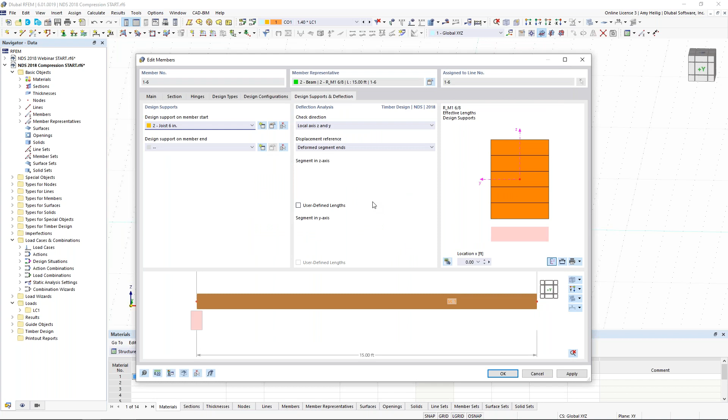I will go ahead and make a copy of this one, and we're going to rename this one to joist 6 inches, and we're going to set the support length to 6 inches. So when I click OK, this allows me to define at my member start that 3-inch support, and we can see this in the background. It will be applicable to these supports over on the left. And then for my support on the right-hand side where it's resting on this girder, we want to select the joist 6 inches. And we can see those supports shown here graphically.

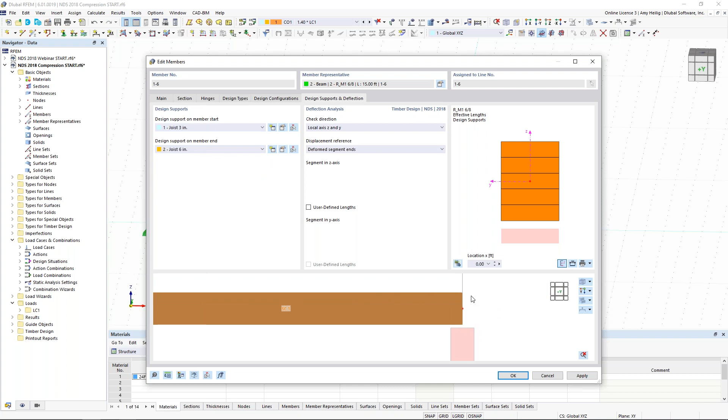Now notice everything is framing in at the center line. If we wanted to, under the main tab, we could activate here the end modifications and we get an additional tab available to us. So what is the advantage here of the end modifications? Well, if we wanted to graphically extend the member to the edge of the support, we could do so with a quick click of a button here. Now, this does not affect the analysis, the stiffness, the design whatsoever. It's purely for graphical representation.

So maybe it's important that you add this to your printout report and you want to show that the member goes all the way to the end of the design support. But just know that internally, we're treating everything with the center lines. Okay, so now that we have defined the supports for our joists, we can click OK, and we should graphically see them now at the bottom of our joists here back within the main program.

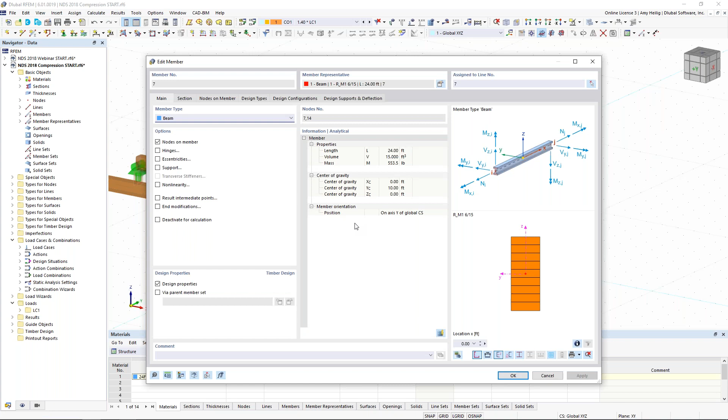Now we want to do the exact same thing for our girder element. I'll jump here to design supports and deflection. I create a new design support definition. This one will be girder 5 inches with the support length of 5 inches. So this is going to be applied at the member start and the member end.

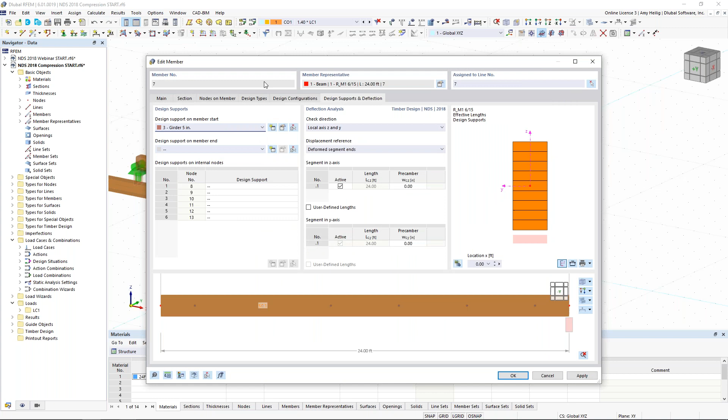Now I want to create a copy of this one, and we will call this one girder 6 inches. The difference here, not only the support length set to 6 inches, but we want to set this on the positive z-axis of the member, as well as activate the inner support. This is where the joists are going to be bearing down at the top side of the member instead. So when I click OK, what we can do here is to select the girder 5 inches, and this will be applied at the member start and the member end here where we have those nodal supports.

Girder 5 inches, girder 5 inches, and then in my interior nodes, which we can see along the member length here, we want to select that defined girder 6 inches. If I hit my down arrow key and F8 on the keyboard, the program will automatically copy the cell before it for each one of those settings. And now we get a better visual representation here of those joists sitting on top of the girder.

But we have one small problem here. Notice that this tab is also used for deflection checks. And now the program's automatically assuming that my deflection should be checked with my L/360 ratio between each 4-foot segment, and that's incorrect. We want the member to refer to the full member length for the deflection design. So how do we fix this? Well, let's go back into the edit settings here for this last girder 6-inch design support. And what I can do is to simply uncheck this option down at the bottom to consider the support in the deflection design.

Alternatively, if we're thinking, okay, we do want to consider the support for the deflection design, but I don't want to check compression, well, what we can do is to activate this here and uncheck the direct support instead. So if we don't want to have those compression checks according to the NDS, just go ahead and uncheck the direct support. But in this situation, we just don't want it to be considered for deflection design. Notice our table updates automatically here to the full member length of 24 feet.

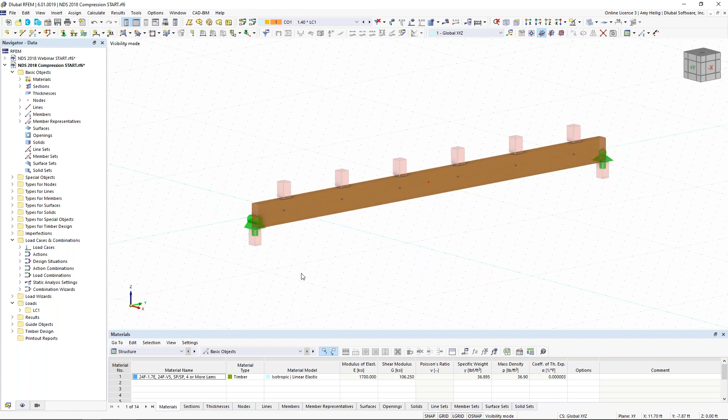I click OK, and now we can see these design supports shown along the girder. Now, if I want, I can select this element and view the visibility by the selected objects, right-click to go ahead and hide the objects in the background. This gives us a better representation visually of those joists sitting along the member, as well as our supports.

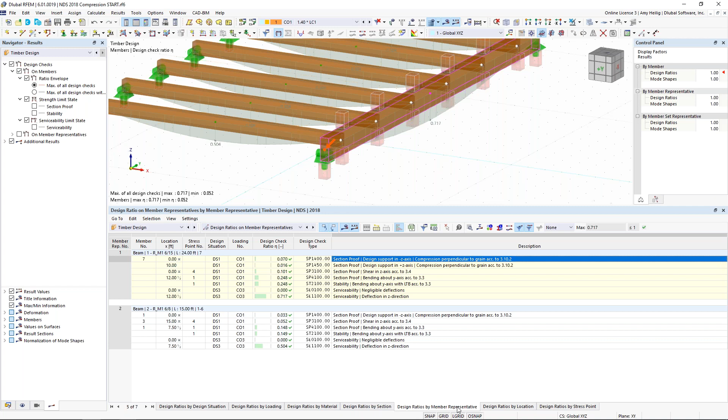Okay, so now that we have defined these design supports, let us quickly run the calculation in the timber design. And I only want to point out what the design calculation details look like for this new check within RFEM 6. So again, I'm looking at my design ratios by member representatives tab down at the bottom. And currently we're looking at the compression perpendicular to the grain according to 3.10.2. So again, this is that new check here.

Well, before we look at the details of this particular check, let's back up a step to go to the static analysis. And this is just going to show me my support reaction for the static analysis at this particular location. And we can see that is 2.35 kips. Well, if I toggle back to my timber design and I take a look at my compression perpendicular to the grain at this location, and I go into my design check details here, sure enough, the compression force perpendicular to the grain that the member must resist is that 2.35 kips for my support reaction.

We look at the additional details here. We can see the bearing length of the design support is set at 5 inches. If you remember, I had manually input that in with the design support. The program multiplies that by the member width, the 6 inches, ultimately to get the bearing area here of 0.21 square feet. So now we can run this calculation check for the compression perpendicular to the grain to get our design ratio of 0.07. So again, this is new within RFEM 6 and it's only available when you define those design supports.

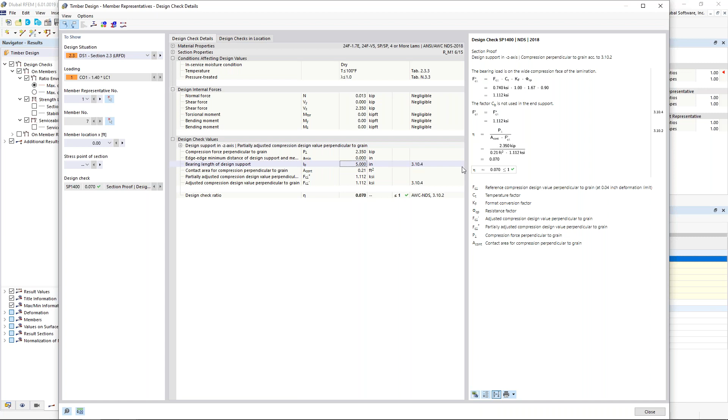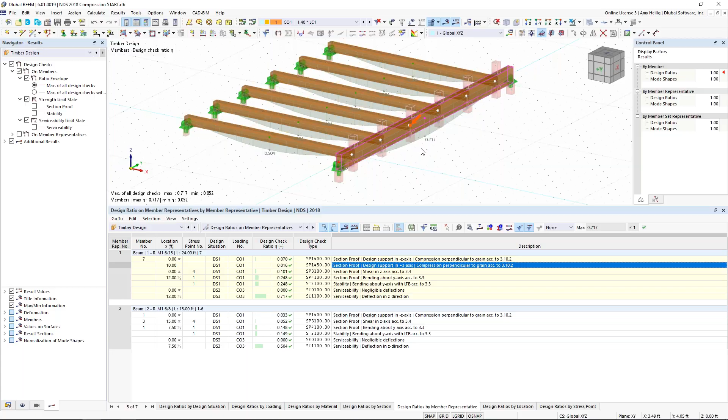If we take a look just a little further down the member here, we're also going to see compression perpendicular to grain, but this time for the positive z-axis. Well, this is those joists framing down at the top of the member. So we'll go ahead and check that similar check here, but rather at the internal point of the member. All right, so that will wrap up our examples today, and we'll go ahead and conclude today's webinar.